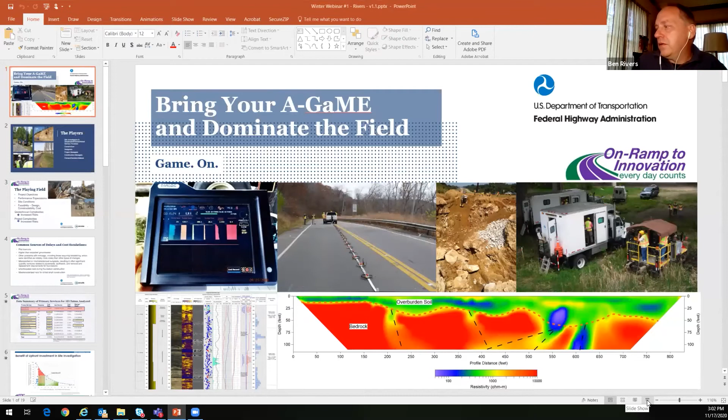Welcome back to the second half of the A-GaME rollout. Some of you may be very familiar with the A-GaME, and this may just be a refresher for you. Others, this may be the first time that you've seen or been exposed to the A-GaME. The bottom line here is that we recognize that we can do better in our subsurface investigation and site characterization efforts. And that's what the A-GaME is about. It is about removing unnecessary uncertainties upfront. Investing upfront in our subsurface investigation so that we remove or reduce the chances of bad things happening during construction in terms of delays and cost escalations.

So front and center, certainly our site investigators and our geotechnical service providers, geophysical service providers have a star role in characterizing our conditions for projects. But we are not the only players in this game. We have contractors, designers, project managers, construction managers, and other decision makers that are instrumental in making decisions on how we are able to invest and get the information that we need for site characterization. Obviously for design, the reliability of the parameters that we get, the constructability of the sites for the complexities that we may run into for various construction projects have a big part. And so all of these players have a vested interest in getting the information that we need for our projects.

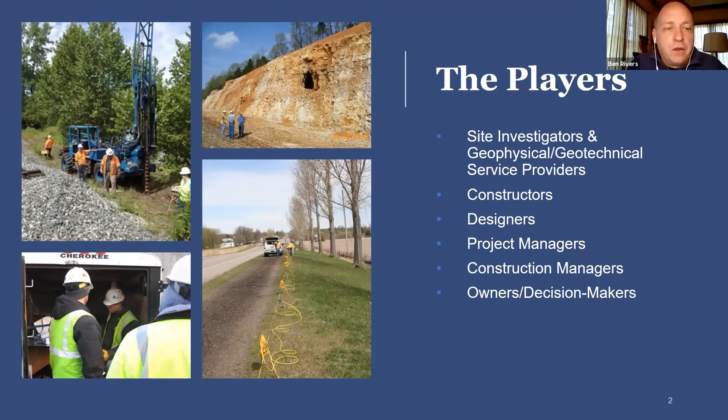So what we're dealing with, the playing field: obviously every project has project objectives that define the intent, the function, the aesthetics, the performance expectations of those facilities, and the conditions that Mother Nature provides us are going to play a part in what solutions we have for coming up with feasible designs and constructible designs, taking into consideration the cost benefit considerations, especially when we're looking at project objectives that may be putting speed of construction up front, or do we have time to allow consolidation to take place, or other methods that may take more time in more traditional solutions, but we need to look at all options. And so we need to understand what those project objectives are so that we can get the information that we need during our site investigation.

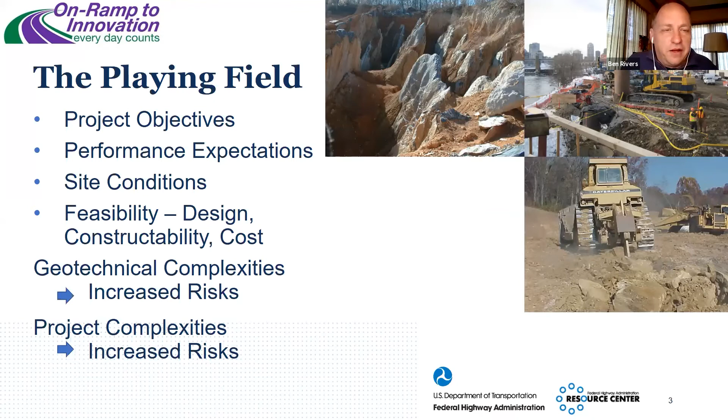And of course, the geotechnical complexities, the project complexities: are we doing a complex interchange? Do we have considerable load demands? Those certainly are project considerations. The complexities could be, as you're seeing in the picture here, where we have karst terrain and pinnacle and cutter type formations, or the materials that we're dealing with in construction: how hard is it to excavate through these materials and construct our facility? So all of these sort of define our playing field. Where are these risks that we are trying to avoid?

This information comes from a synthesis called NCHRP Synthesis 484, the influence of geotechnical investigation and subsurface conditions on claims, change orders and cost overruns. These are probably very familiar to most of you out there in cyberspace.

Pile overruns. Groundwater has always been very impactful in any geotechnical construction effort that we do, and they were certainly cited in this report in two methods here: higher than expected groundwater conditions, seepage, and other requirements that contractors need to be aware of for dewatering. Those things being surprises can be quite costly.

And when we get into mischaracterizing materials or not characterizing those at all, missing them completely when we get out in the field and we break ground, if we're getting into conditions where we have to remove and replace excessively, or decide if we need to go back to the drawing board and do ground improvement or other design redos, that certainly is going to impact our time schedule and cost for our projects.

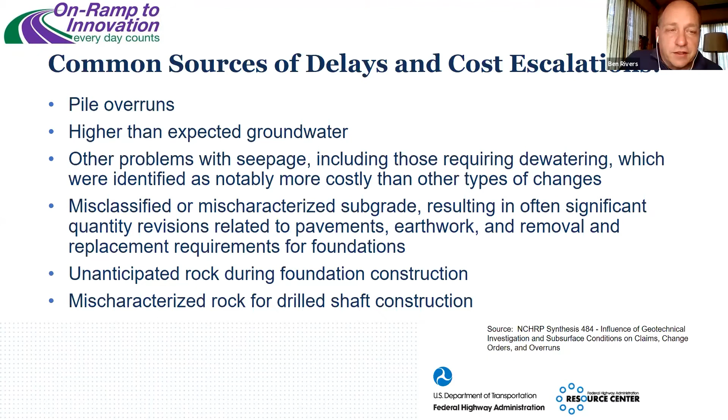Very recently, in fact, somebody pointed this out to me just a few weeks ago. Yabusaki from UC Davis, well, it's based on her work while she was at UC Davis, but it was published in the Geo-Congress last spring, did a report where she was looking at claims that were reported to geotechnical companies or against geotechnical companies.

And there were, I think, 1,500 cases that she reviewed. Of those 1,500, about 900 she analyzed closely because they were significant. And if you just look at the data that she provided, this is very consistent with what we found in our Synthesis 484, where we knew that up to 50% of all change orders, claims, cost overruns were due to geotechnical issues. This is that subset of data that are geotechnical issues.

And within that subset, you're seeing that 44% of those claims were directly related to the quality and the scope of geotechnical investigation. And then we also recognize, and this is consistent with what was found in Synthesis 484, that indirect claims, change orders, cost overruns were related.

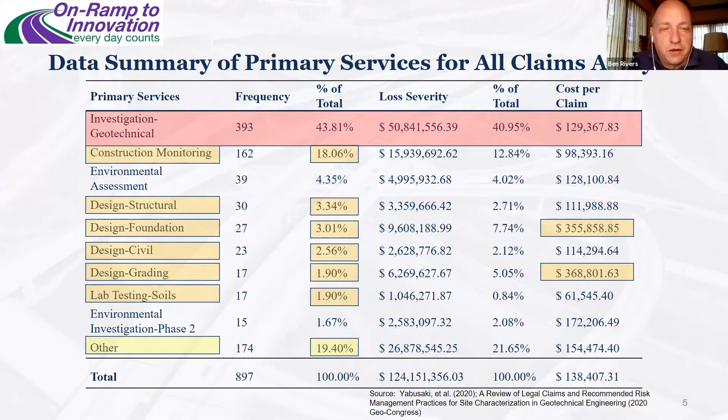In this case, these are claims that were related to foundations, grading, that were indirectly related to the subsurface investigation quality and scope. And a significant amount of those indirect claims have a huge part, dollar amount wise, when we're looking at all of the influences that are directly or indirectly related to the quality and scope of our subsurface characterization.

This is one of my favorite graphs. It comes from Synthesis 484. On the y-axis, you can see cost escalation, and on the x-axis, you can see the cost of our subsurface investigation. And you can see an obvious relationship between the two. In transportation, typically, we spend about 1% to 3% of our project budget on site characterization.

Imagine if we were wise about how we spent that 1% to 3%. And imagine that when the risks are there, where we can ask for additional funds, where it's warranted, we can significantly reduce the likelihood of bad things happening during construction.

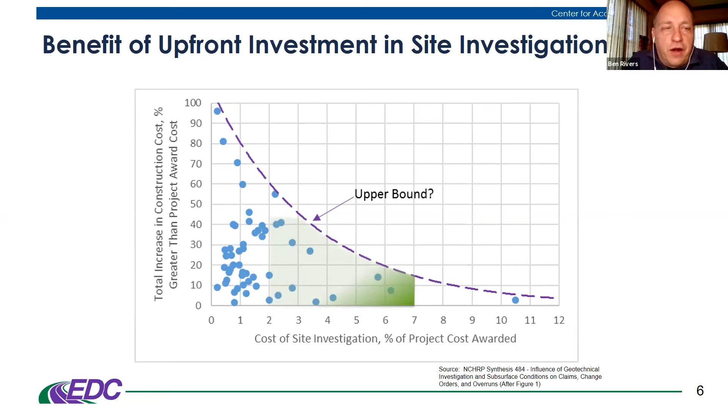The strategy, and this is consistent actually with what Yabusaki came up with as well as recommendations, the strategy first and foremost is to be smart about how we do our subsurface investigations. So using a rational approach and not using an ad hoc or prescriptive basis for applying minimum standards and requirements. We want to be thoughtful in what type of information is going to provide the most value for us.

Using effective, underutilized investigation methods; we have more tools in our toolbox than the standard penetration test. And many of those technologies have been around for a long time, but they remain underutilized. And so looking explicitly at what types of methods can help us characterize and get the information that we need is part of that strategy.

The communication: obviously, we as geotechnical engineers have a part in interpreting the subsurface conditions, coming up with that model that explains variability and the parameters that we use in design, and how easy or hard it is for us to construct in those materials.

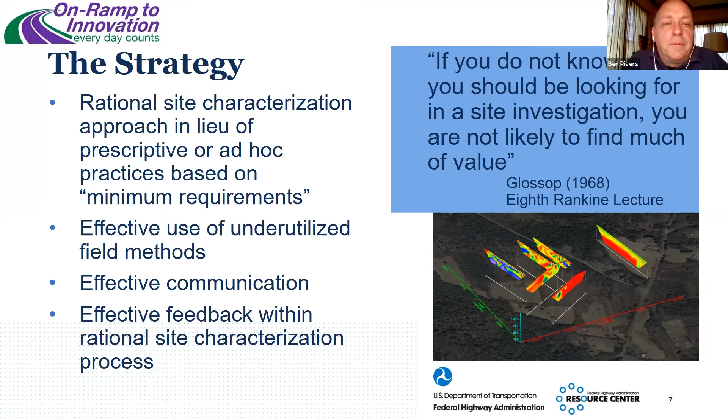This first and foremost starts with understanding the conditions, coming up with a preliminary model that we have the ability to come up with from our experience with certain regions, conditions, understanding where we can find information from the web, Google Earth, USGS, a whole bunch of information that we can gain before we even start getting out into the field. We can come up with our preconceived notion of what subsurface conditions we anticipate. And that's key in this rational process. We anticipate what we're expecting. We scope our subsurface investigations accordingly.

And there's a point at which, and I think this is a very important concept that came up during one of our A-GaME workshops, if we take a moment just to stop at this point and look at our risks and look at our project requirements and information that we need for our designs and construction, and think about what we need to focus on as far as variability and design parameters, we can make an argument to those decision makers that perhaps we need more than those minimum requirements, to invest more in that subsurface investigation program.

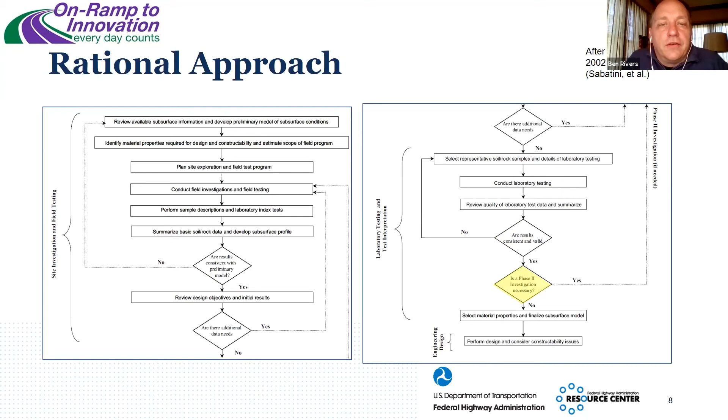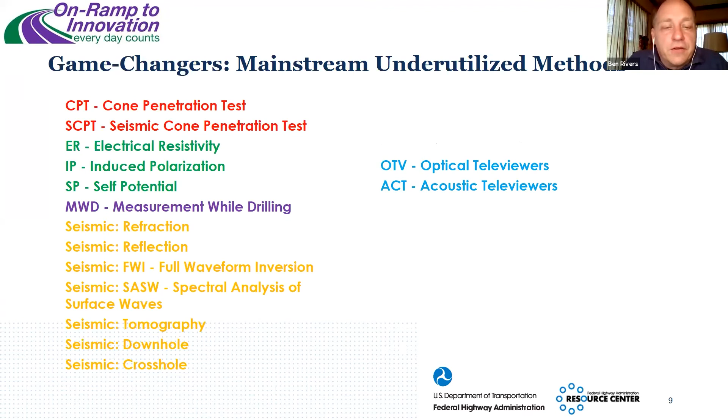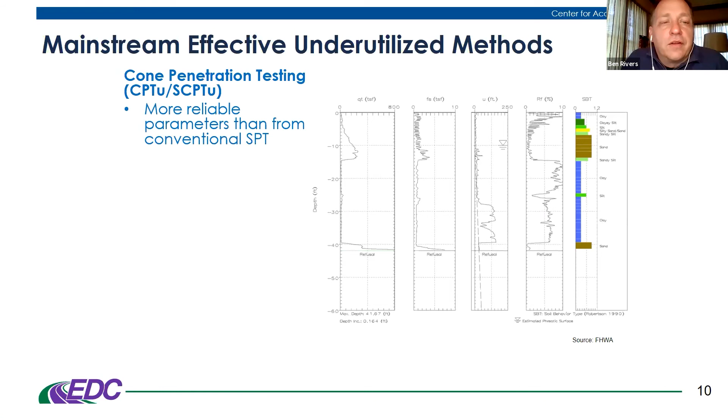Many of you are familiar with the cone penetration test. It is not a new test, but it remains underutilized. If we can be pushing cones into the ground, we probably should, because they're more reliable than traditional and conventional standard penetration tests. In index values, we can actually see variations as we get through the ground and distinguish where those changes occur.

We can get pore water pressure measurements that are fundamental to geotechnical engineering and effective stress. So how well we characterize effective stress and how well we characterize groundwater conditions, as you remember, being one of the major contributors to problems in construction, the better we can do. And traditionally, we have not done a great job characterizing groundwater conditions and their influence on both the constructability and the design side.

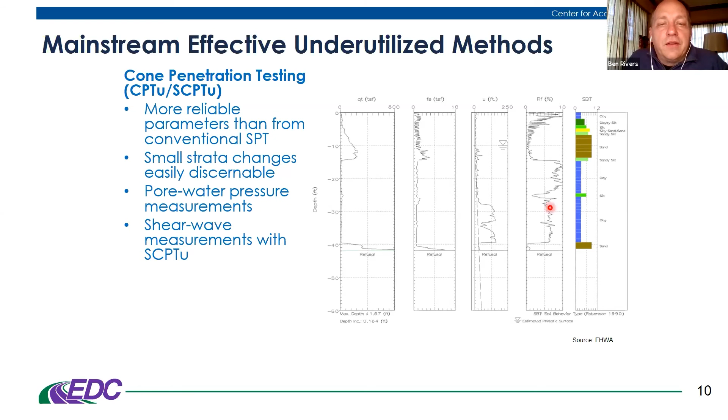Shear wave measurements can be captured with an additional contraption or instrumentation on a cone penetration cone, so that we can actually see shear wave velocities or capture that data, as well as the other data: cone penetration or the tip resistance, skin friction, pore water pressure, and then the friction ratio that you see here that can distinguish behaviorally what those materials might be. But specifically, we can see those values and have a more reliable measure for design.

This cone penetration test is 3 to 10 times as fast as conventional drilling, which adds a lot for this method. And its safety is something that I didn't list here, but it's been mentioned quite often. We're not around spinning equipment. In this case, we have a safer environment to get these measures.

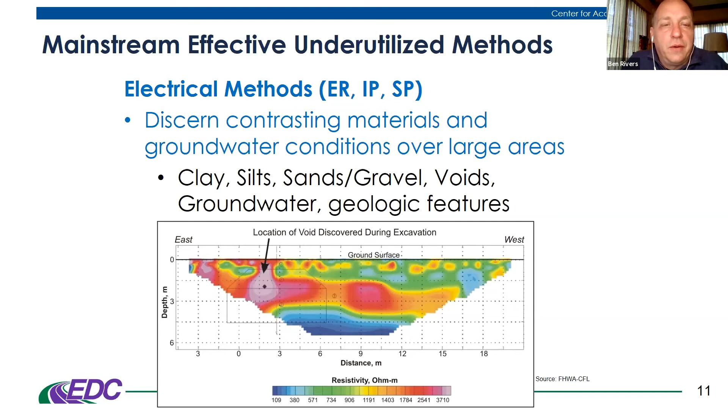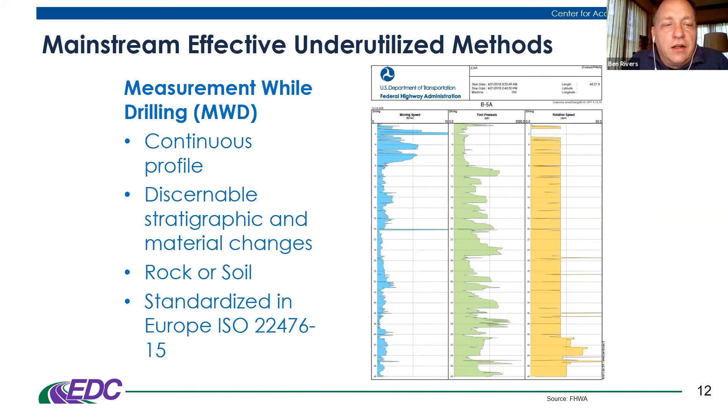We're able to, very similar to the cone penetration tests, discern different materials within the subsurface. And we can actually even drill in rock where we wouldn't be able to push a cone. So we can discern materials, we get a continuous profile. This is typically data that a driller would be marking on the boring log, saying that we have chatter from 3 to 8 feet. We can actually see that in the data that we're gathering when we're using measurement while drilling instrumented drill rigs. Very useful technology, and I think it has a lot of potential for subsurface investigations. We'll hear more about that in a bit with Montana's talk.

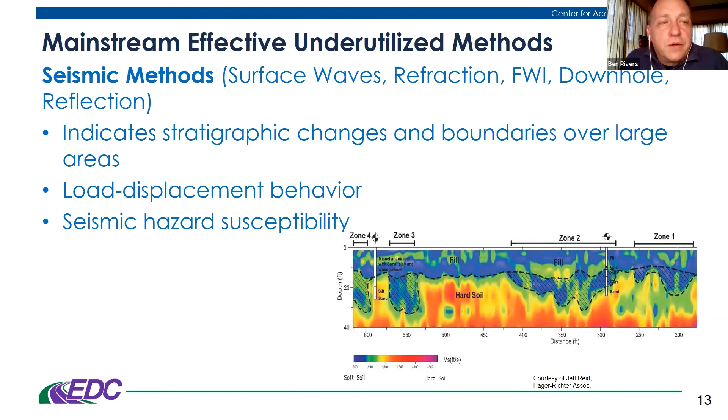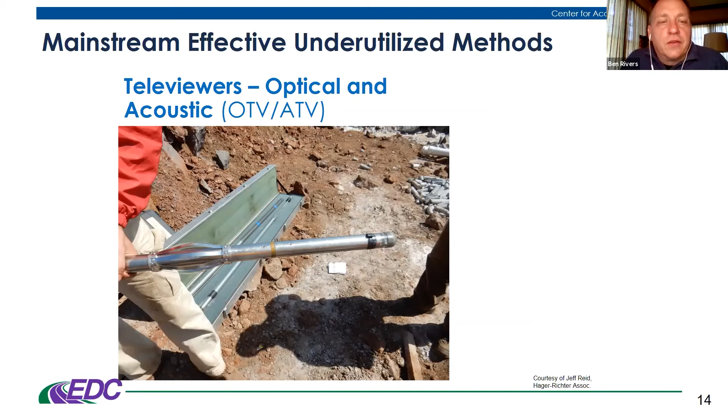Acoustic and optical televiewers. This technology has been around for a long time, but is really picking up speed, and people are understanding the value. You're seeing a probe here, or part of a probe anyway. It's an 8 to 10 foot probe, and you're seeing the instrumentation at the tip here, in this case an optical televiewer with centralizers, that once we do coring, or we have a core hole, we can put this probe into the ground and get measurements continuously as we're coming up: high quality, high resolution, 360-degree spatially oriented data, continuous. We can get data for the in-place rock structure.

In the past, before this technology, when we were looking for oriented coring, that's quite a difficult operation, and this certainly takes the place of it by providing the same data, spatially oriented. It's also independent of the core quality. So if we're not getting great core recovery and samples back, this can show us the in-place conditions that the core is not telling us.

So a great, valuable technology, especially when we're looking at rock quality and conditions, structural geology.

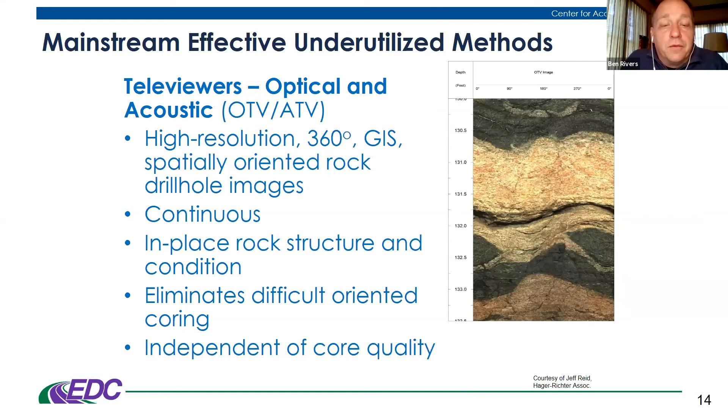What you're seeing here is a sinusoidal wave of an open joint. If you imagine wrapping this, you're seeing 0 degrees to 360 degrees, the entire circumference of that image. Wrap it, and you have a dip and dip direction given by these discontinuities, and you can see significant structure here that may be valuable for our designs, and you can get the statistics and joint sets represented in stereonets and other features.

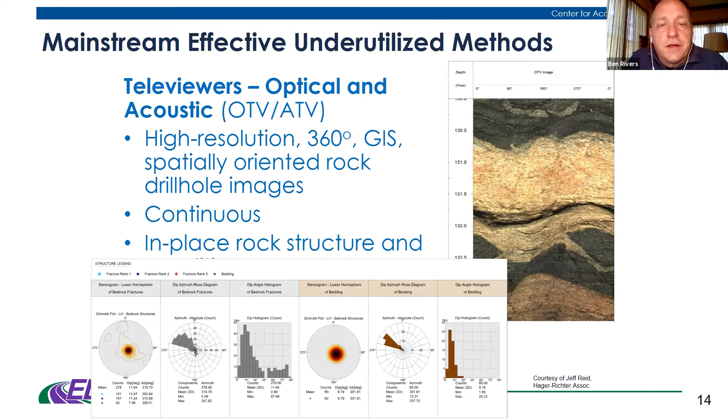Ultimately, what we're looking to do is do better in our subsurface investigations, improve current practice by reducing risks, removing those uncertainties by being smart about our subsurface investigation and applying methods that are most appropriate for getting the information that describes the parameters we need for design and the variability we have in both design and construction.

The quality can help provide reliability for our designs, and by preventing those problems during construction, we can more readily accelerate project delivery, prevent bad things from happening and keep projects on track, on time and on budget. So that is the A-GaME.

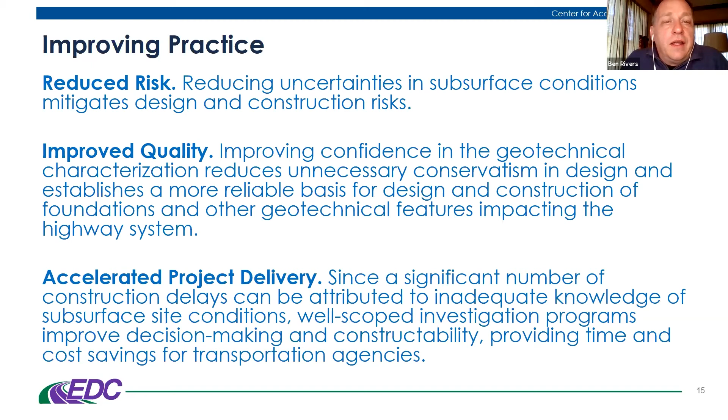Looking at the future, some of you may be familiar with a digital exchange for geotechnical data, a schema known as DIGS, very similar to the AGS system in the United Kingdom. It's been in the works for 20 years or so, but most recently AASHTO has put out a provisional standard of practice to incorporate that schema. Any time we're transferring or exchanging data within systems, DIGS is going to be quite revolutionary in improving processes.

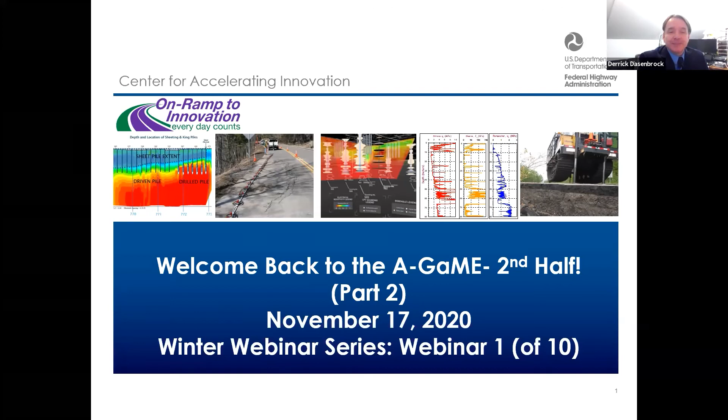So today is webinar 1 of 10 of what we're calling our winter webinar series. So by implication of 10 webinars, there will be 9 additional ones. They'll be occurring weekly at the same time on Tuesdays. So our next webinar is November 24th. We'll be sending out the registration for that webinar shortly after today's.

And it's going to be on the topic of selecting the right tools for the job and achieving project design and constructability objectives. It'll be a great session. We have 2 invited speakers, Jerry DiMaggio talking about geotechnical fundamentals, and Erik Loehr, who'll be discussing risk and site variability.

And following those 2 presentations, we'll be heading into a panel discussion where we will have representatives from 5 departments of transportation: California, Washington, North Carolina, Minnesota, and New Hampshire, to talk about some of their state experiences in how to select the right geotechnical tools out of the A-GaME portfolio and additional tools for geotechnical projects.

After that, the next session will be on contracting and how to assemble your A-GaME team. On December 8th, we'll be having a session about outcomes and how to win the A-GaME, and that'll be part of a larger event, which I'll get to shortly, EDC 6 Virtual Summit.

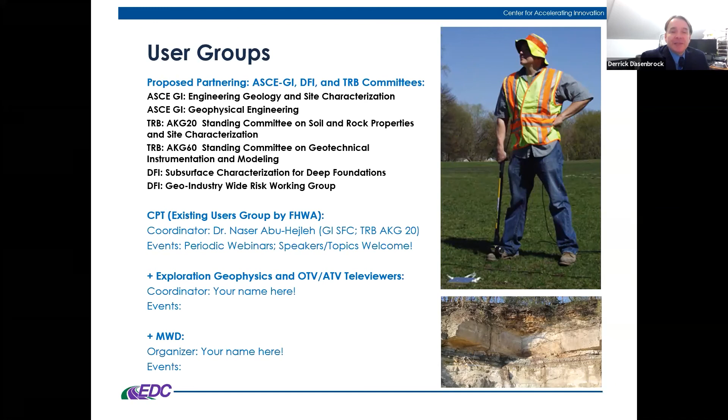And we're also looking at establishing a similar type of users group for exploration geophysics and televiewers, and another one for measurement while drilling, as both of those are technologies that we're also interested in getting more collaboration on as we move forward.

With that, I would like to move into our next session as part of today. So this is what we called our lightning round. So 10 states responded to a call for an opportunity to present what they've been working on as part of the A-GaME. And they have prepared short 3-minute presentations where they're going to be now able to discuss with you the highlights of things that they've been doing in their own states. So I'm looking forward to seeing those, because there's been a lot of really great progress on the state level. And with that, I will stop the screen share here, and we'll roll the videos.

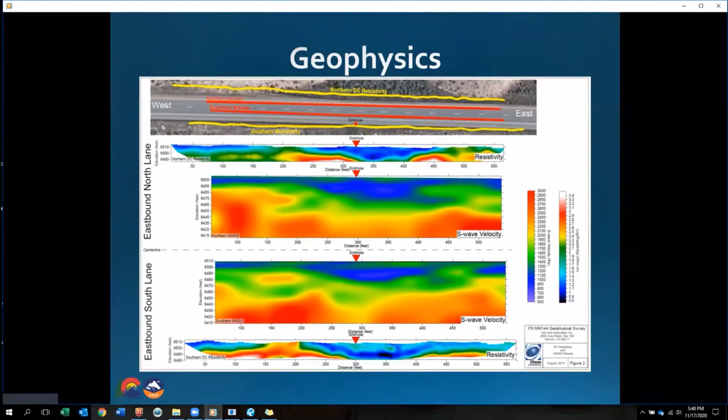Hi, my name is David Thomas. I'm with the Colorado Department of Transportation, Soils and Geotechnical Services. I'd like to take a minute or two just to talk to you about our experience with A-GaME. At CDOT, we try to use geophysics where we can. We find that it's really quick, get a lot of information for a reduced cost. Also, if we do traditional drilling, we're going to impact traffic. So geophysics goes a lot quicker than having a drill rig out there for 2 or 3 days. In this case, we used S-wave and resistivity to analyze a subsurface where we thought there was a void. It turned out it was soft soils and not a void, so we were able to actually address that issue properly.

We also use GPR, or ground penetrating radar. We use this mostly on pavement distress analysis or to find buried or lost culverts. In this scenario, we had some pavement distress, and we thought it was actually from settling soils and we had a void under the highway, but it turned out to be a slope stability issue. And this helped us to quickly analyze it and address the issue properly.

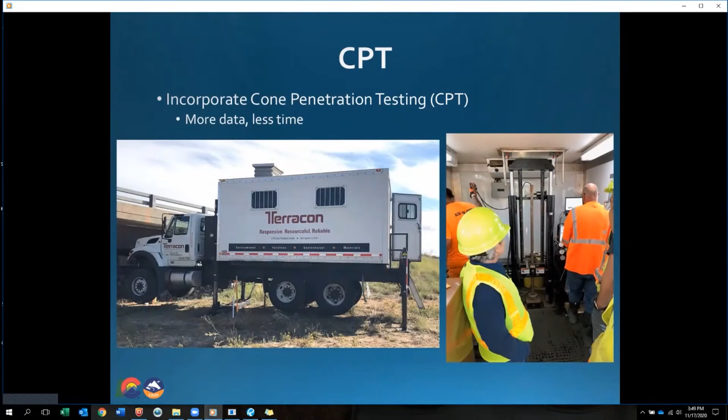We're trying to get more CPT, or cone penetration testing, in Colorado. It doesn't really work in our rocky mountainous terrains, but on the eastern plains and on the western slope where there's thick clay deposits, we found we can get a lot of data really quickly. We've also used this in conjunction with scour testing for hydraulics, and this helps us to get a lot of data for the scour testing so we can focus where our drill rig is going to be and take samples.

What we want to do in the future is also incorporate augmented reality. It's really neat. It's a great function. You can see a lot of data in 3 dimensions, present it to stakeholders so they can easily digest the information. The only problem is the cost. The headsets are a cost, the data development's a cost, the modeling's a cost. So is it better to purchase these items or just have a consultant provide these items at a set cost?

So some of the challenges and solutions we've faced, it's marketing and education. You need to meet with designers, let them know these other aspects and these other things are out there. Also, project involvement and timing. We need to ask for the project list so we can be upfront on those projects and where we can apply the A-GaME technology and help save projects money and time. Also, the project schedule and needs. Does it even apply to the project? Is it going to be useful or just another tool that is never applied to the project?

And then funding. Who's going to pay for it? Right now, we're looking for grants. We're begging, we're pleading, we're trying to find any way for the project to help use these new tools to show them the money up front is a cost saving at the end.

Alaska Department of Transportation and Public Facilities has used geophysics on a project-specific basis for years. But when the Every Day Counts 5 A-GaME initiative came out, we recognized that geophysics could enhance our in-house drilling program. We procured capacitively coupled resistivity and ground-penetrating radar equipment and hired an Alaskan geophysical expert who we had worked with in the past to train us on those techniques and on Alaska-specific applications. Our primary goal was locating ice-rich permafrost and massive ice. Those are the biggest geotechnical hazards in our region.

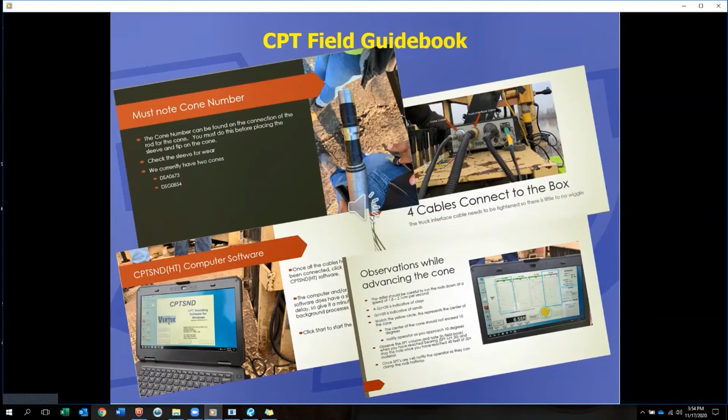To help train others in the field with the use of our CPT rig, we created detailed field guidance instructions specific to our equipment. These instructions begin with preparing the filter ring to cable connections on the rig to software setup and procedures on the laptop. We have also created CPeT-IT and CLiq software instructions to assist with data analysis. We don't use the CPT on a regular basis, so these items have helped with data analysis.

MoDOT's geotechnical section is continuing research to correlate NKT factors to laboratory undrained shear strength and SPT values. Due to COVID-19, we have been unable to travel, so our sites are limited to nearby locations. The current research involves 3 sites: a typical clay over shale in northeast Missouri, a clay silt overlying deep sands near the Missouri River bottoms, and a site with deep fat clays near the Gasconade River.

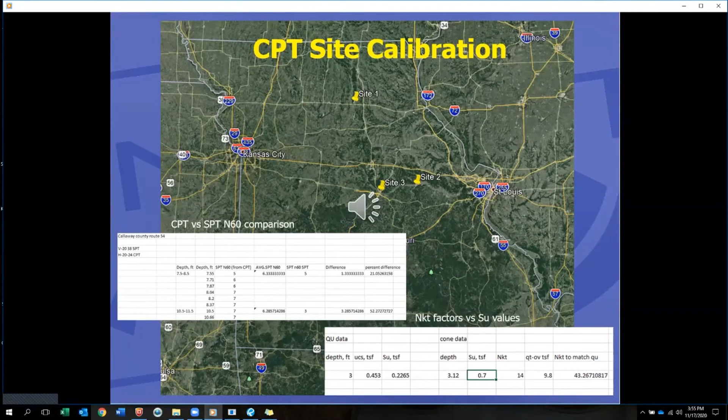Our plan is to develop a site calibration process to allow more frequent use of the CPT on projects with proposed piles or settlement concerns. Our former director had begun these calculations just before his retirement. Unfortunately, time has not allowed for reviewing his work, but we are about to pick that back up again.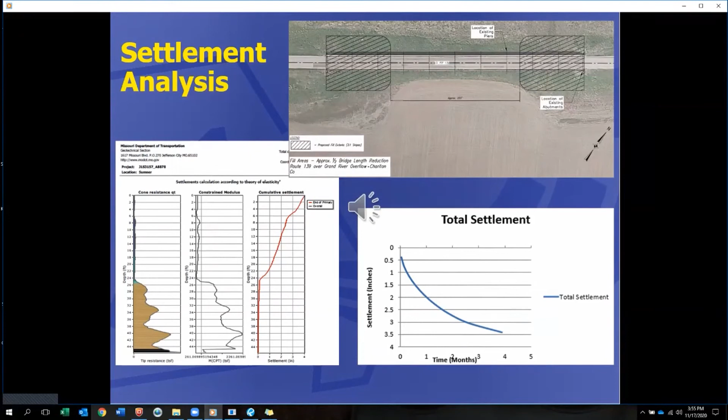This project consisted of reducing the bridge length by half its length and will consist of approximately 15 to 20 foot fills at the Grand River overflow. Construction should begin very soon.

Just recently, we have seen an increase in pile overruns during this construction season. While reviewing past projects, we have noticed very high phi angles within our CPT data compared to typical phi angles calculated using the effective overburden correction of N values in sand when using equation 5-2 and table 5-5 modified after Bowles 1997 in GEC 12. We are beginning to look at our CPT values and determine if a correction is needed in our CPT calculations.

We are also trying to compare the static pile capacity derived from our CPT data during design and PDA CAPWAP pile capacity data obtained during construction. We are continuing to look for ways we can increase our CPT use, as time is always against us. Our biggest hurdle overall is knowledge of the CPT and analysis of the data we obtain.

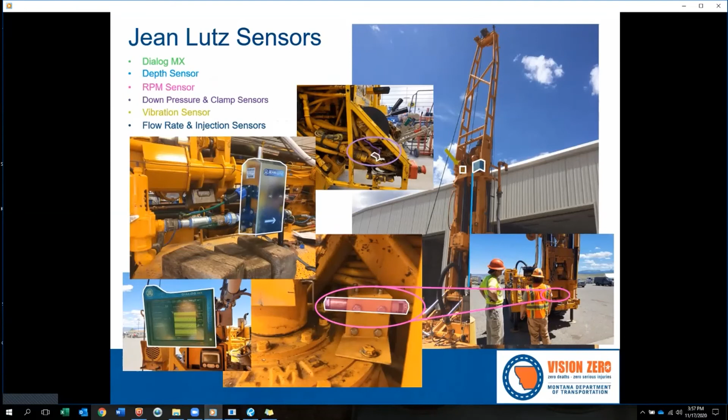This is Nick James, Geotechnical Engineer with Montana Department of Transportation. A summary of the work we've done to add mechanical torque measurement to the MWD system on our CME 1050 ATV drill rig. The slide here shows the sensors that were provided to us by Jean Lutz America and that have been installed on our rig. Unfortunately, no mechanical torque sensor is currently available with our system, so we've had to install two mechanical torque sensors on our rig. The first attempt was to use mechanical torque within the driveline.

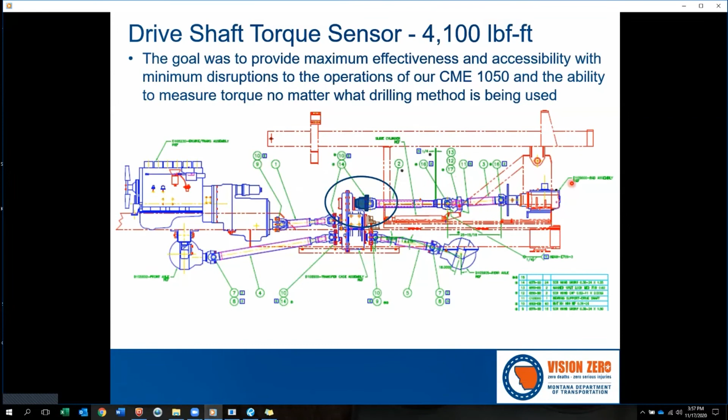This is a schematic of the driveline of the 1050. The purpose was to provide a location that is out of the way but yet accessible and able to be used to monitor torque regardless of the drilling method used. The sensor was installed in the companion flange here between the transmission and the drive shaft. A new companion flange had to be manufactured. This is a picture of it, manufactured companion flange with the sensor on it.

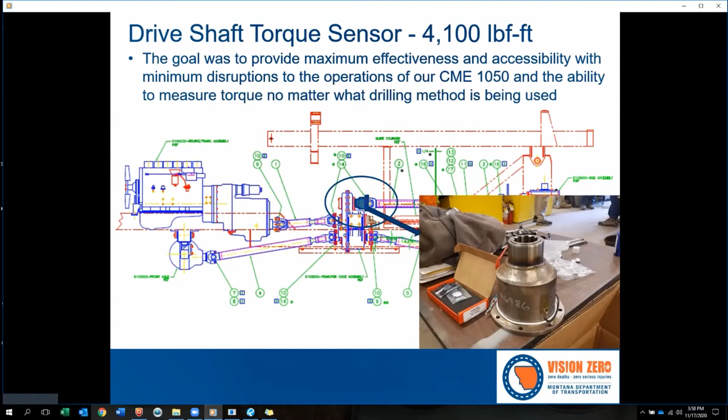Benefits of this sensor location is it's easily accessible, the part is cheap and replaceable, and it can measure torque with any drilling method used. The downsides are the companion flange may be too stiff and possibly tone deaf to subtle changes in the torque. Torque losses between the sensor and the drill bit need to be accounted for, and there may be some signal loss between the wireless transmitter due to the sensor being protected.

The second spot we put a sensor was at the API drill rod. The purpose was to provide torque measurements at the front end of the rig.

API drill rod is manufactured by CME, and you can see it here. Benefits of the sensor being here is it's easily accessible, the losses across the rig are reduced, it provides higher resolution than the drive shaft sensor, and it can measure torque with multiple drilling methods. The drawbacks are the collar is too large to fit in the augers and needs to be removed every time the augers are being used.

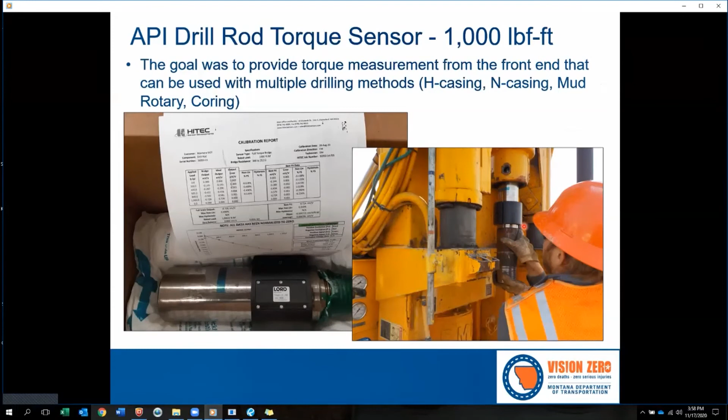So torque sensor communication, we've had some problems with the Torque Link 200 wireless system. The sensor communicates wirelessly with the gateway you can see here. However, we've noticed that the sensors have to remain on all the time in order for them to work properly, which burns the battery out. The battery has to be replaced about every 100 hours.

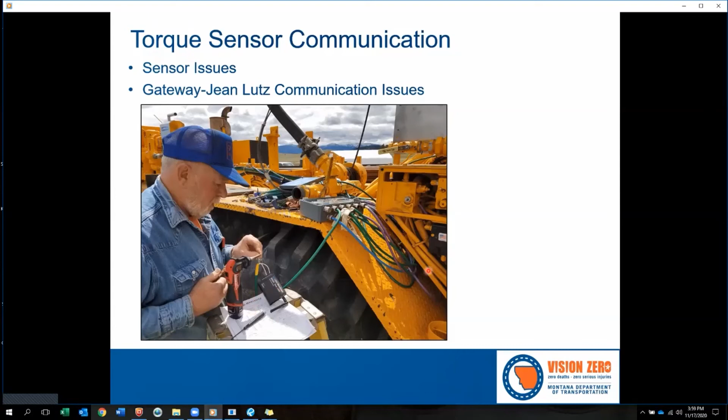The Jean Lutz system gets a continuous signal from the gateway, which is digital, and then the Jean Lutz system has to convert it back to analog, and then it converts it with a conversion factor, which we are working on with Jean Lutz.

What's next? Next on our list is to get the companion flange repaired, and we may need to machine the ID a little bit and recalibrate it, and we're working on that this week. We need to consider potentially instrumenting a 5-foot flightless auger or the power head adapter at some point, and we may need to consider a wired system.

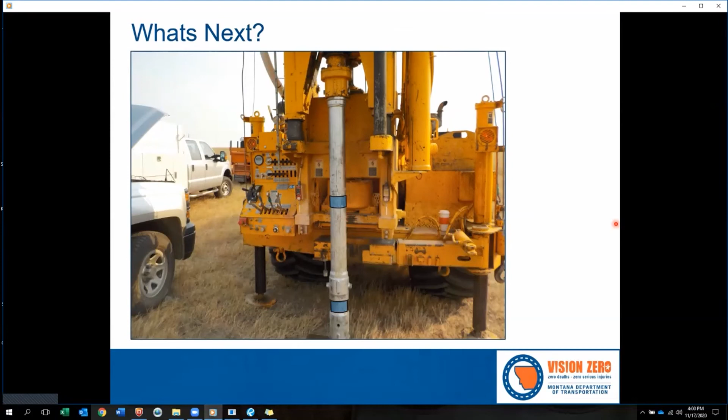Jennifer Rauch here. I'm the Assistant Geotechnical Engineer and A-GaME Co-Chair for MassDOT. I'll be your guide through the zoo that is MassDOT's A-GaME update.

Before the rest of March was on Groundhog Day mode, we had a plan. It was a fabulous plan too. And then in mid-March, we were sent home, thankfully not for being on the naughty list. At the moment, the bulk of MassDOT staff have yet to return to our offices in downtown Boston and our district offices across the state. All our planned local workshops and initiatives went the way of the baby in the bathwater, down the drain. Like so many, we pivoted. We're like Marines. We adapted and we overcame.

We got an offer from UMass Transportation Center to host our planned April workshop via webinar through them. It was the perfect opportunity to pivot. All we had to do was have the estimable Mary Nodine show up and wow our audience, and she was aces on October 1st.

MassDOT's geotechnical section has historically deployed what are now known as A-GaME technologies, where they make sense for the state's subsurface conditions. We were the cool kids before the cool kids knew they were cool. Particularly, we've deployed CPTs and geophysical surveys at various projects. We've also deployed televiewers on design build projects. As MassDOT does not have drill rigs, we have not yet explored measurement while drilling.

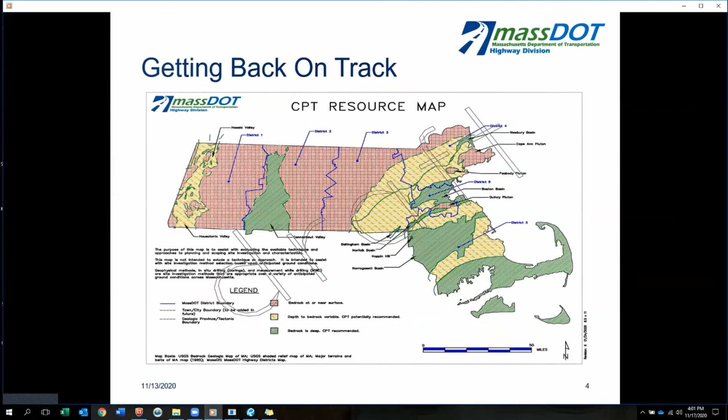One of our A-GaME team members came up with an ingenious idea for a simple resource map to aid with navigating where the A-GaME technologies may work best across Massachusetts. We developed a draft paper map and an engineering directive, basically a how-to use this map guide, CPT for dummies. We got 10 feet from the finish line with getting this map and engineering directive in for review and approval and just ran out of gas.

But as we've gone through our Groundhog Days teleworking from home this past summer, we are slowly crawling our way to getting back on track for some of our A-GaME objectives. As work between design projects and solving construction issues allows, we are plugging away at knocking some more A-GaME objectives off our to-do board, and even planning a few more to try and bite off and chew.

Through MassDOT's Office of Planning and Research, the Geotechnical section has been awarded funding for a research project involving development of an overburden thickness and depth to bedrock map of Massachusetts. The technical terms of 2D raster image for GIS and VHSR is way above my head. I am the project champion for this research, and we have just recently selected a project investigator in Dr. Mabee. I'm super excited for this work, mostly because Dr. Mabee is super excited for it. It's a great opportunity nonetheless, and it also ties into our A-GaME initiatives, which is just a bonus.

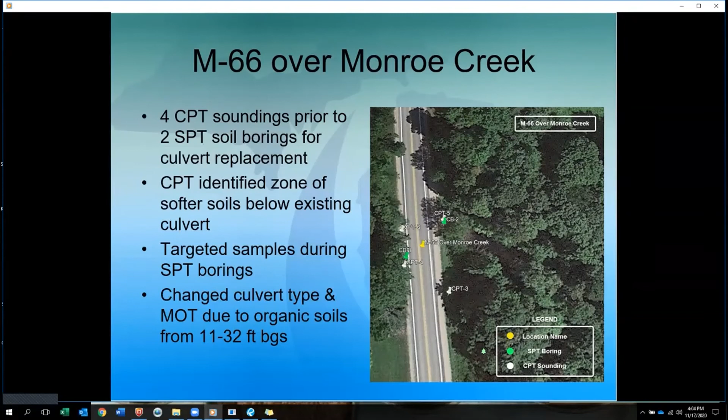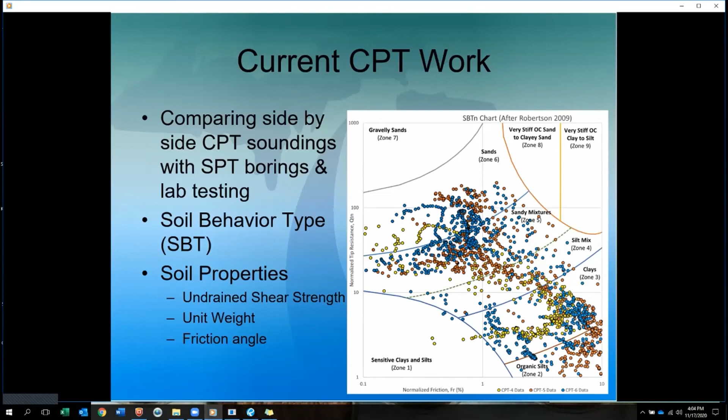MDOT is currently working on comparing the side-by-side data from the CPT, SPT, and laboratory testing. We are working through the difference between soil behavior type and soil classification, and are comparing CPT correlations to soil properties such as undrained shear strength, unit weight, and friction angle from laboratory testing. We anticipate working on completing side-by-side design with CPT and SPT data and determining how and what information to present with the CPT in our plan sets.

We are setting up training for MDOT personnel to gain more experience with CPT, and then we'll incorporate our findings into a technology transfer with FHWA, our consultants, and local agencies. These trainings are partially funded with STIC funds from FHWA.

Initial lessons learned include that top-down support for CPT is beneficial. We have the support with A-GaME and MDOT's management. Also, STIC funds can be used to defray state's cost for specialized equipment purchases. We are happy with the user-friendly CPT equipment and software, as we have started to use the CPT with remote training because of COVID-19 restrictions.

We have seen a more detailed stratigraphy with CPT and improved production rates of about 2 to 4 times over SPT borings. With our self-anchoring CPT rig, the anchors typically pull out prior to running out of push force.

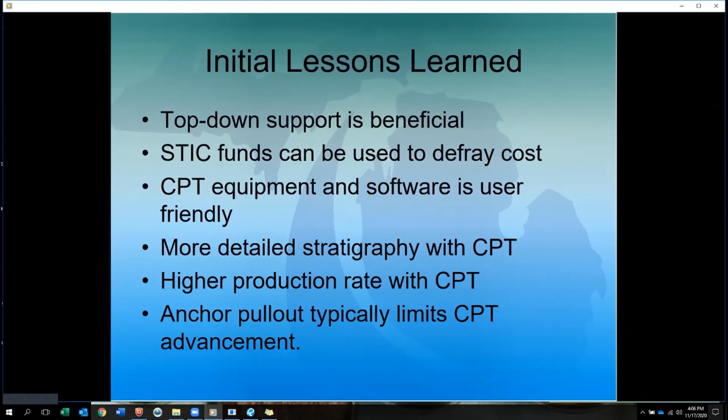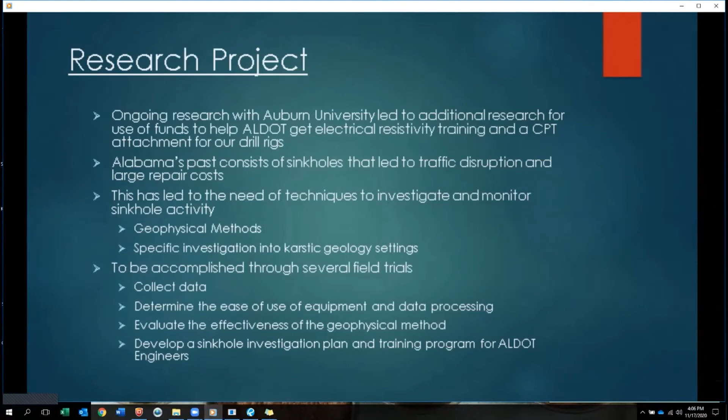Hello everyone, this is Desiree Douglas with the Alabama Department of Transportation, and I am the Assistant State Geotechnical Engineer. I will be talking about our use of geophysical methods for sinkhole exploration using electrical resistivity surveying methods. ALDOT partnered with Auburn University to investigate and monitor sinkhole activity, with specific interest lying in Alabama's karstic geology settings.

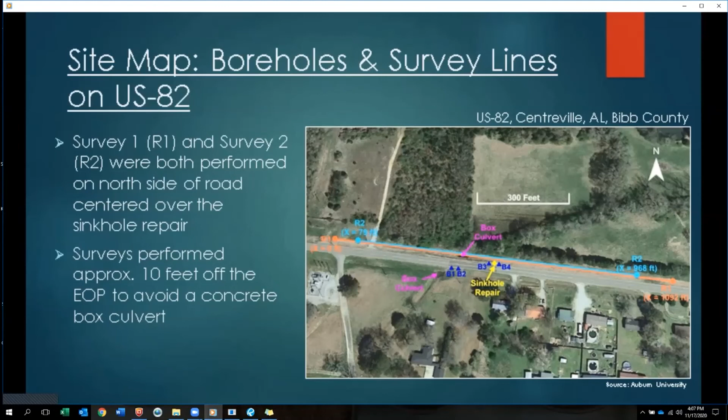This map shows a sinkhole of US Highway 82 in the same general location. There were also 2 survey lines conducted parallel to previously drilled boreholes. These surveys had to be conducted approximately 10 feet off the edge of pavement to avoid a concrete box culvert, as such structures skew the survey results. It must be noted some misfit data had to be deleted from these surveys to obtain a final model.

Feature 1 shows high resistivity, possibly indicating raveling soils. Feature 2 shows a vertical discontinuity, possibly indicating a dip in the rock surface. Feature 3 shows a low resistivity area, possibly indicating fractured, saturated limestone. This is consistent with open voids found during the well drilling program. This could also indicate soils are being eroded. Further investigations are required to confirm these assumptions, however.

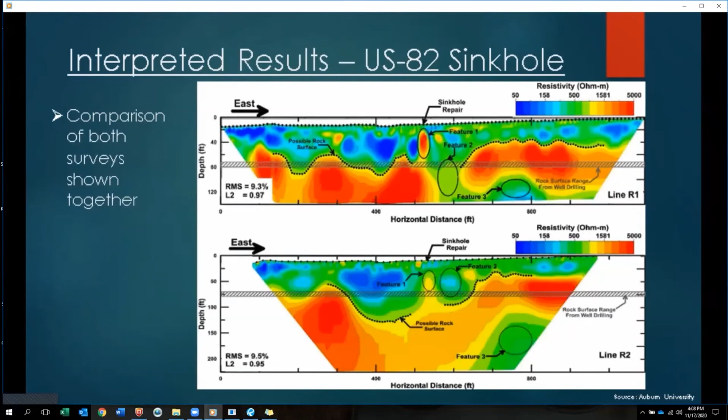Some of the challenges we have faced are Alabama's state purchasing laws make it very challenging to purchase equipment. And of course, training with the use of the equipment and data interpretation is hard to get scheduled. Also, the presence of utilities, structures, and certain topography make for unreliable surveys.

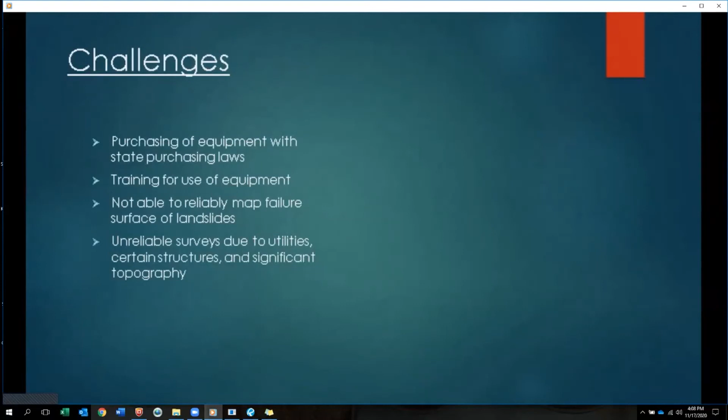Going forward, ALDOT and Auburn University hope to continue research surveys together. ALDOT still holds a learning curve with our recently purchased CPT equipment. ALDOT hopes to tie in the electrical resistivity surveying with other subsurface exploration methods. Our ultimate goal at ALDOT is to establish a database of information pertaining to Alabama's geology.

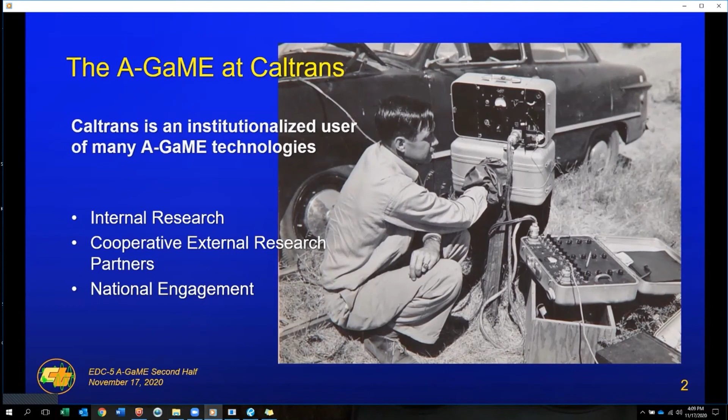The Geophysics and Geology branch provides a number of in-house services, including several A-GaME technologies: refraction and refraction tomography, surface wave inversion, surface resistivity, and optical and acoustic televiewers. The A-GaME technologies are a subset of the services we provide, but comprise a significant percentage of our work.

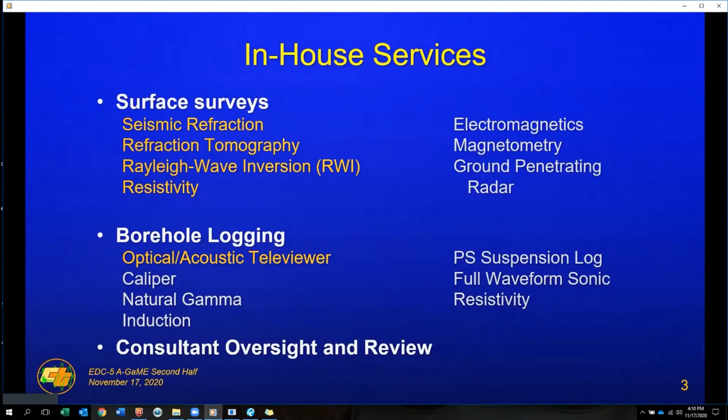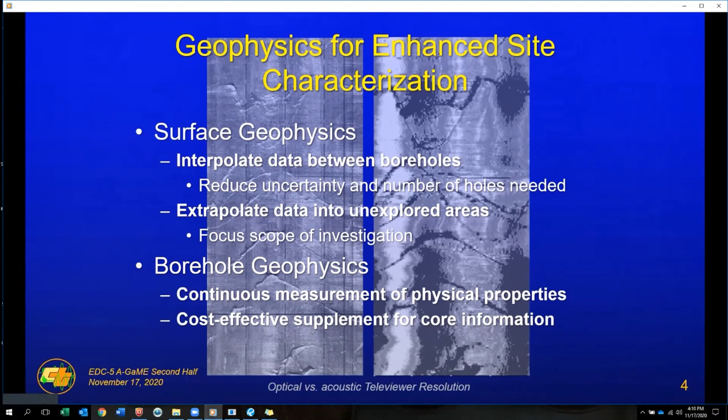Surface geophysical techniques are used to extrapolate geologic data into unexplored areas. Where no test hole data exist, geophysical reconnaissance provides valuable data to guide the drilling program and to focus the scope of the investigation. Borehole geophysics measures physical properties from sources and receivers suspended in a borehole. These methods provide continuous measurement along the entire length of the borehole, augmenting discrete information obtained from more expensive lab analysis of cores.

Because geophysical methods cover more area than drilling, they improve data coverage. The portability of the equipment improves accessibility and reduces environmental impacts. In addition, the methods allow in-situ measurement of many earth properties that are important for foundation design.

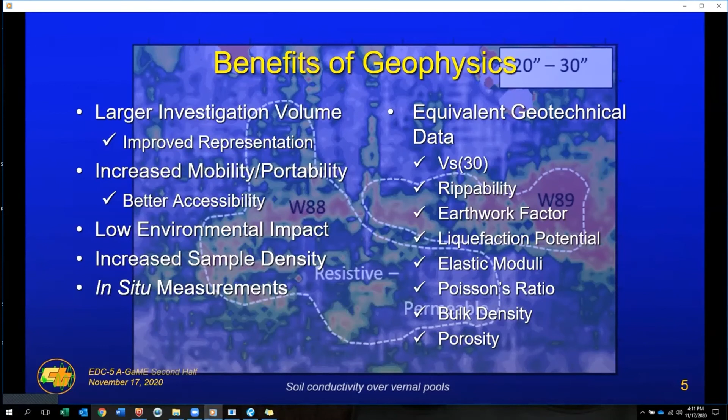For project design, geophysics improves our ability to understand and predict the behavior of earth materials. By acquiring geophysical data before drilling, we help guide the drilling program and allow focusing the geotechnical investigation to areas of greatest concern. That goes beyond the concept of saving money by reducing the number of drill holes or lab tests. It also improves our knowledge of the engineering properties of earth materials and their spatial variance.

This information allows less conservative design, better cost estimating, and fewer surprises during construction. A more accurate portrayal of subsurface conditions with good prediction of engineering behavior results in better bids from construction contractors and aids the owner in defense against claims. So for project construction, geophysics gives us additional means to verify the quality and capacity of essential foundation elements.

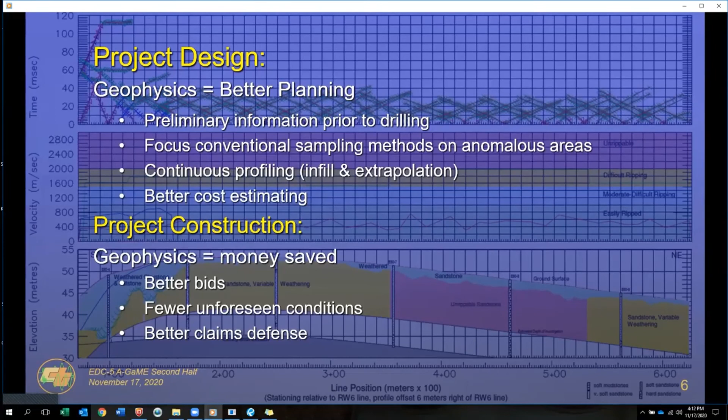In conclusion, selective use of geophysics can yield significant cost savings and improve the quality of geotechnical investigations. At Caltrans, we realize cost savings and added value through our in-house application of routine geophysical services.

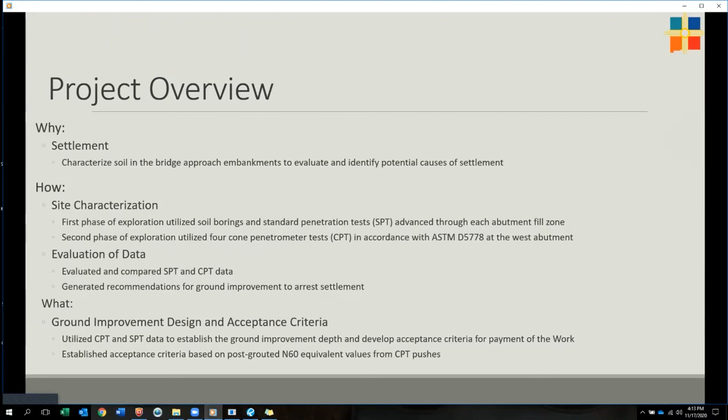The project is located west of Los Lunas, New Mexico, about 40 minutes south of Albuquerque. The approach fills are on the order of 20 feet in height and are comprised of sands with some fine-grained clay and silt zones. Groundwater is in excess of 100 feet below grade.

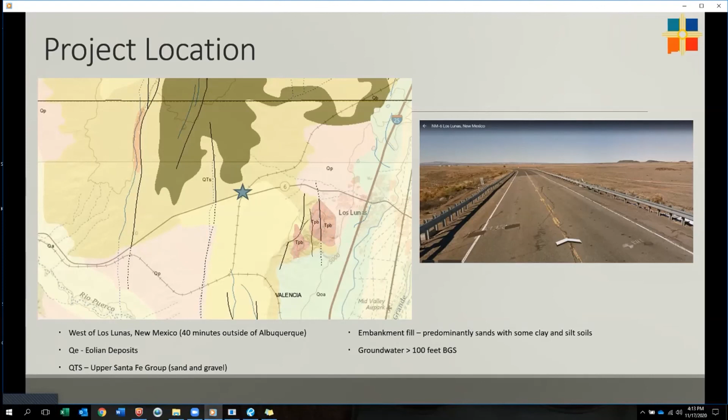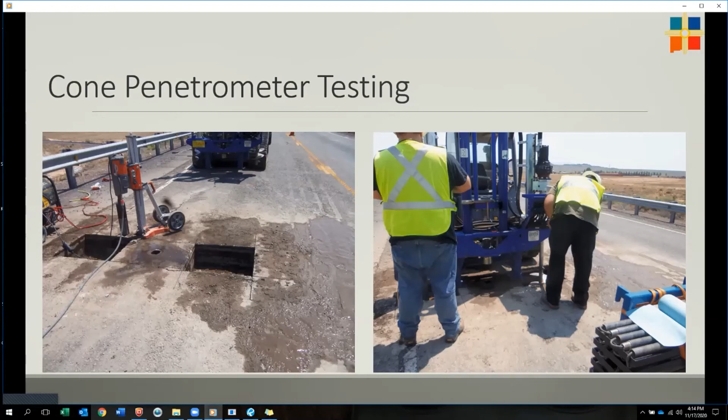CPT soundings were advanced with a skid steer mounted S4 universal push system manufactured by Vertek ARA. The reaction force was provided by twin 12-inch helical anchors set at approximately 7 feet below ground surface. Due to the anchor requirements through the pavement surface, a lesson learned was the additional time on site, coordination efforts between all subcontractors, and additional fees associated with removal and patching of the HMA to accommodate the anchors.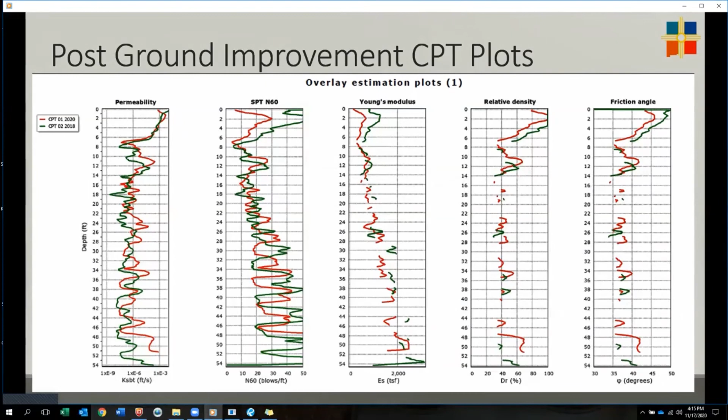To quickly summarize, our geotechnical site characterization consisted of 2 borings and 4 CPT pushes. Exploration data was used to characterize embankment fill and generate recommendations to arrest or decrease the rate of settlement. Compaction grout densification extended to a depth of about 23 feet below existing site grades to address the loose fill zones in the embankment and about 3 to 4 feet in the foundation soils.

The department generated a special provision for ground improvement and based acceptance criteria on CPT N60 equivalent values performed after the first phase of compaction grouting. Post-ground improvement CPT pushes show changes in the SPT N60 equivalent values and other measured parameters, but results were not what we or the contractor expected to see.

As we drafted the special provision, we required the contractor to generate a remediation plan if the acceptance criteria wasn't met. As a result, the contractor generated the remediation plan for department approval, and all remedial efforts were performed at no additional cost to the department.

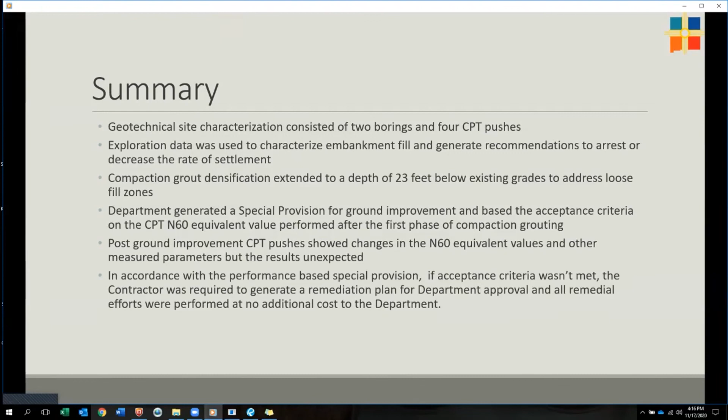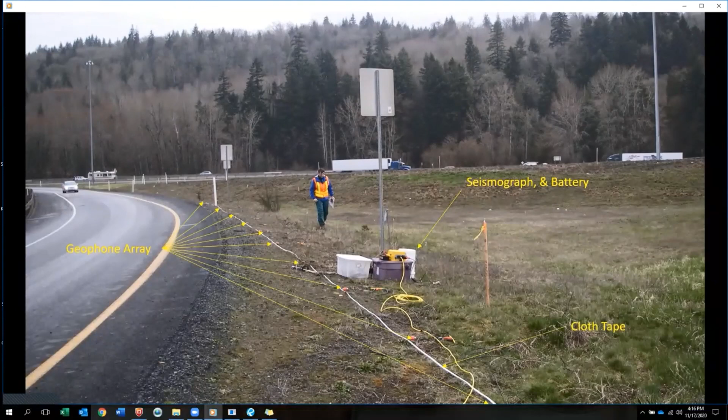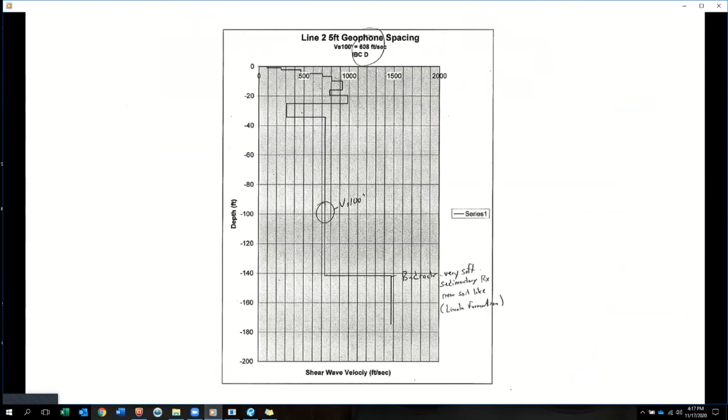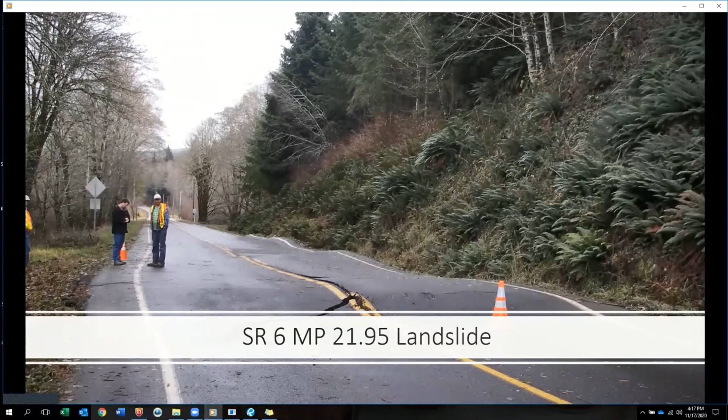Seismic refraction is a technique that we use often to interpolate between borings when we want to find the depth to a dense layer, such as at landslides. Using the same equipment that we use with the ReMi method, with the addition of an energy source that's hooked up to our seismograph, the energy source is usually a sledgehammer or a Betsy gun, we're able to develop subsurface profiles showing the depth to dense layers and the seismic velocity of those layers.

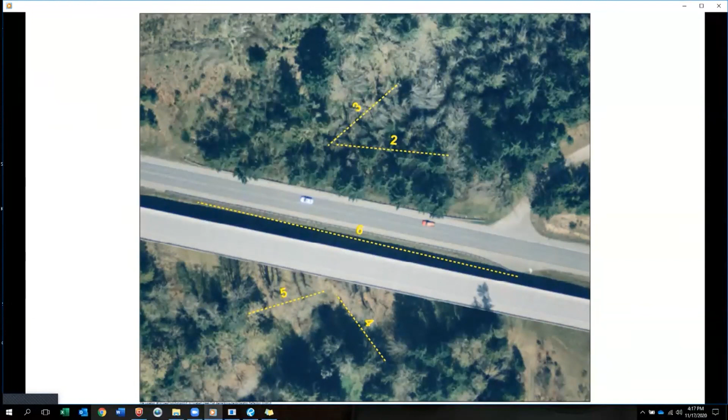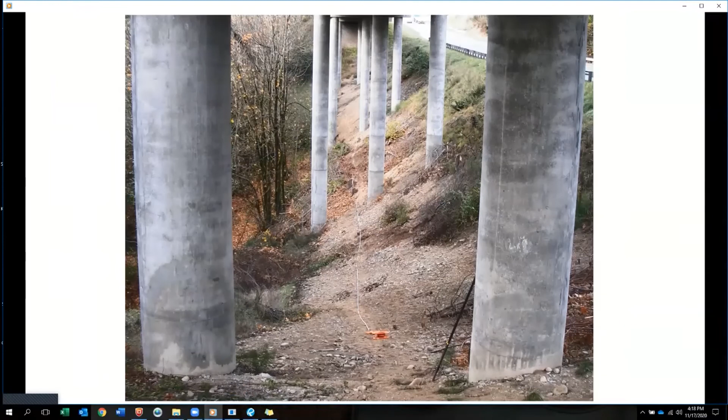This fish barrier removal project required removing a lot of fill adjacent to this bridge in order to get rid of this fish barrier and replace it with a new bridge. In order to find depth to bedrock, we planned a series of seismic arrays using our in-house seismic refraction equipment and developed a nice 3D model showing the bedrock surface beneath the entire site. By importing the data from this model into various softwares, including Adobe, we were able to make this 3D model, which designers are able to use to cut cross-sections wherever they would like.

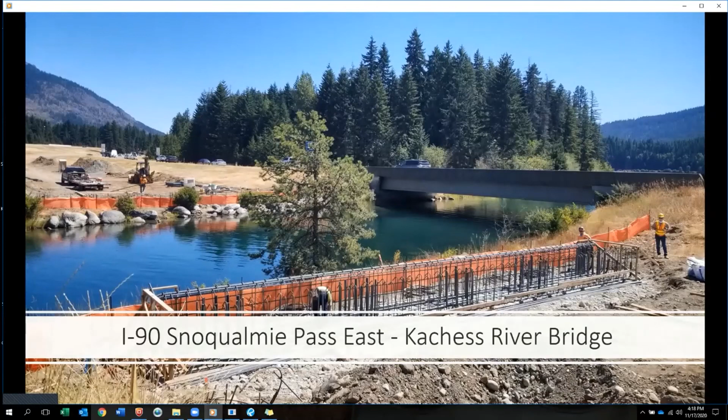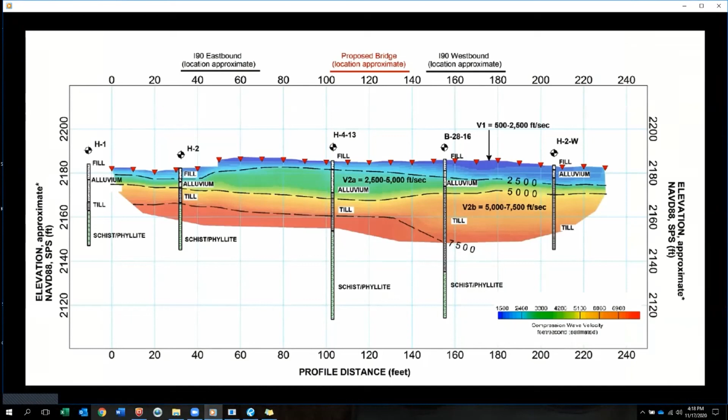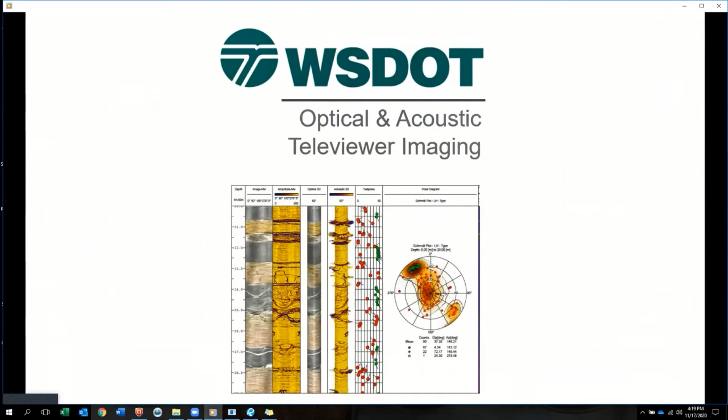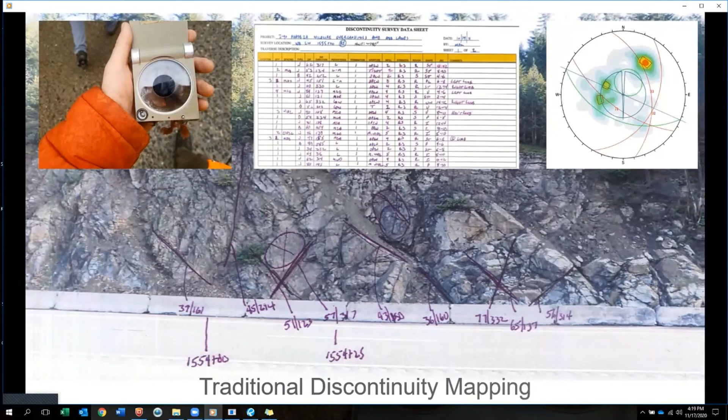WSDOT also uses optical and acoustic televiewer imaging, including at Snoqualmie Pass, where we're designing some new rock cuts along the side of I-90. The televiewer data is used to augment traditional discontinuity mapping. The optical portion of the data is used above groundwater, and the acoustic portion of the data is for below groundwater. The A-GaME reduces uncertainty and reduces risk.

Okay, thanks to all of our presenters. I'd like to express our appreciation to each of the 10 states for putting together those videos, as well as all of our colleagues at the FHWA divisions, our EDC5 champions, and certainly all of our state DOT partners. Well done, everybody, and we greatly appreciate that a lot of great work has been going on over the past summer, despite some hardships.

So a look to the future. As Ben noted in his presentation, really the A-GaME initiatives for geotechnical site exploration provide a launching pad to a number of other types of benefits. We're looking to the improved site information for risk reduction, reliability, variability assessment, improving quality really throughout the geotechnical process, because it starts with good subsurface information. And then we can use that improved information throughout our design and analysis process to get better information to provide to other stakeholders and customers. And that really results in oftentimes accelerated delivery, overall lower project cost.